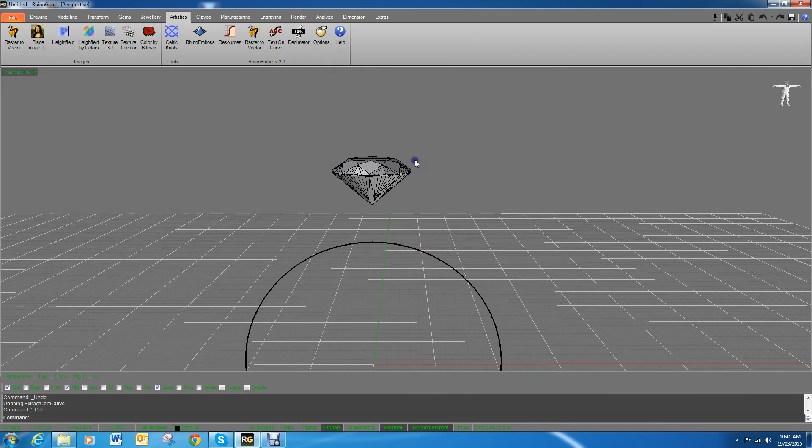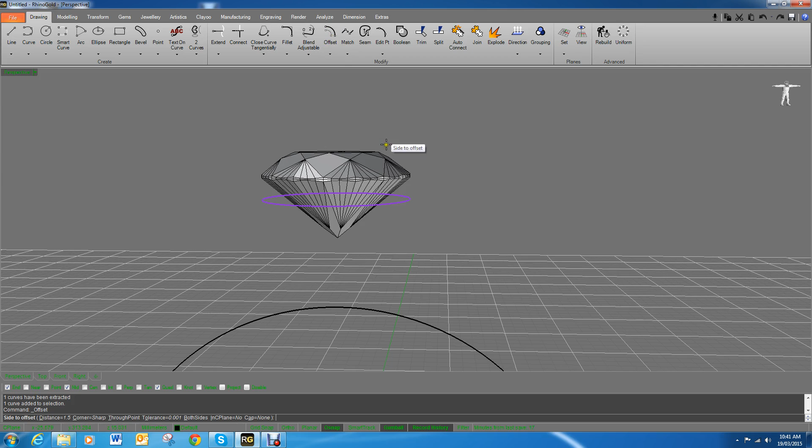We'll get started. We'll pick up the diamond, go to the Gem tab, extract curve, and perhaps lower it a bit by -1 mil, and I'll offset that line.

By approximately 1.6 mil, just a little bit bigger than the diamonds I'm using on the side. I'm going to use 1.5, and give it a slight angle where the setting is. I'll pick up these two curves, and tapping the Alt key you'll see the plus sign coming, and now you can type 1.5 mil and it gives you a duplication of that line below.

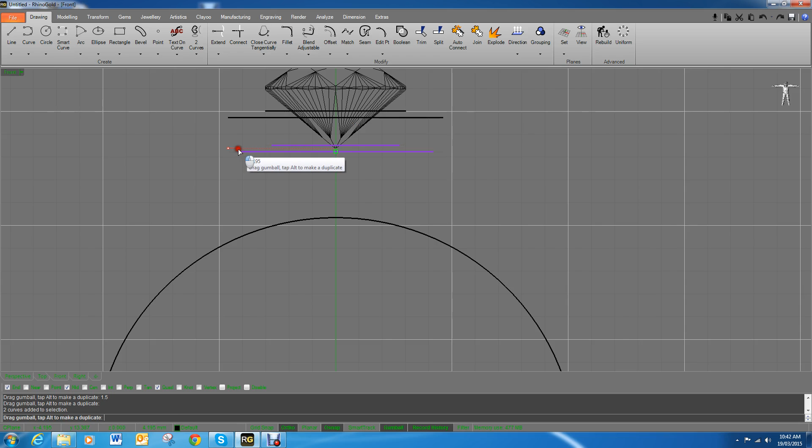Highlight these and scale it down a little bit to get a slight taper on it, as well as take the inside one and scale it inward a little bit so you have a little bit more body on the halo from the back where it's not going to be seen. It can be a little bit thicker.

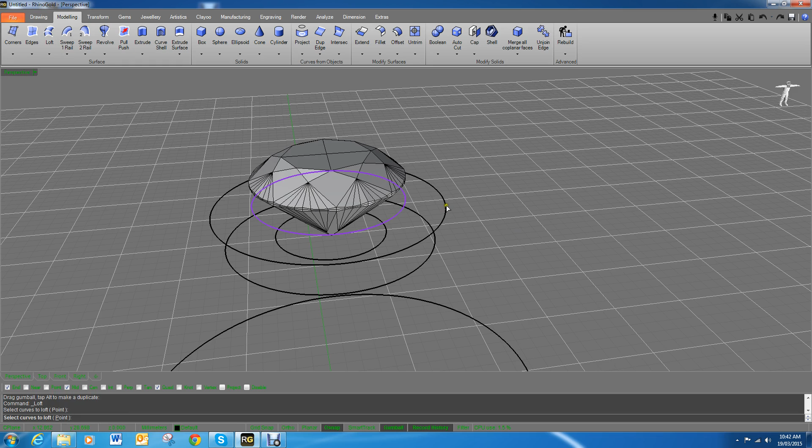From modeling, you get loft, click 1, 2, 3, 4, make sure you pick them in order. Doesn't matter which order to start, as long as you put them all in order - you can't jump in between. Make sure the lines are correct, press enter again and click close loft.

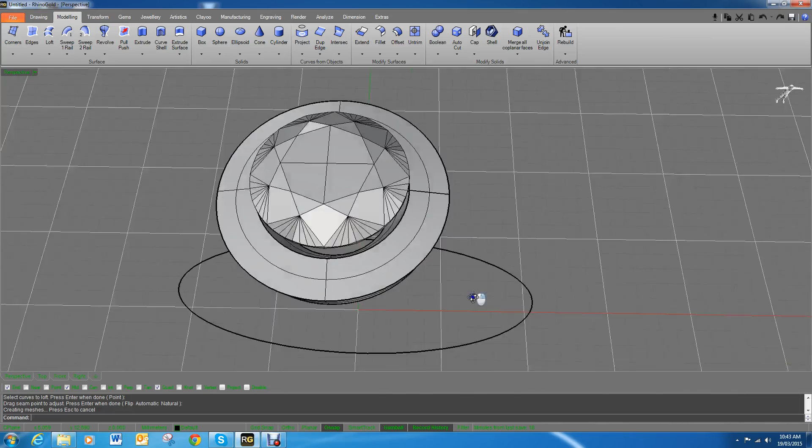And now we've got the plate to place a gem on it. I'll pick up... it's important to add a couple more layers every time you start a new job, just to be able to use different color layers and hide them. Some jobs require a lot more.

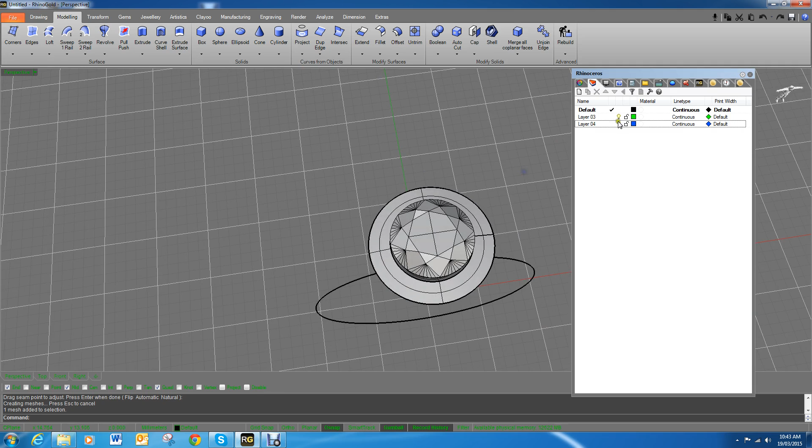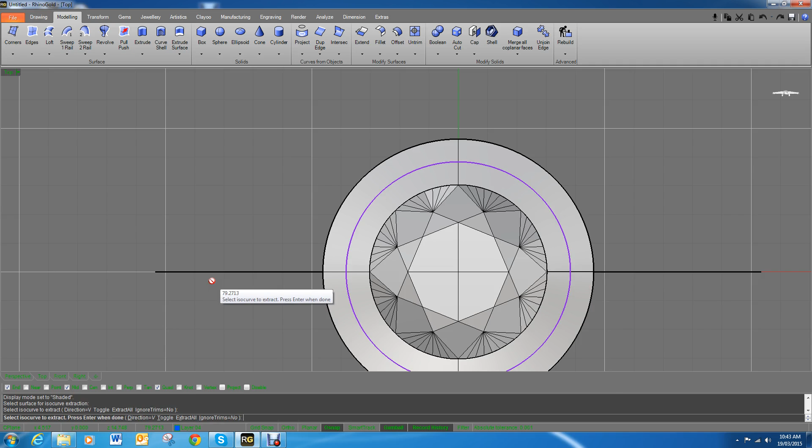So now I'm going to pick up the blue one, and from the top view I'll go to duplicate edge, tap and extract ISO curve, and this is a good tool that actually gives us the ISO curve of the surface, and on it we can apply the gem.

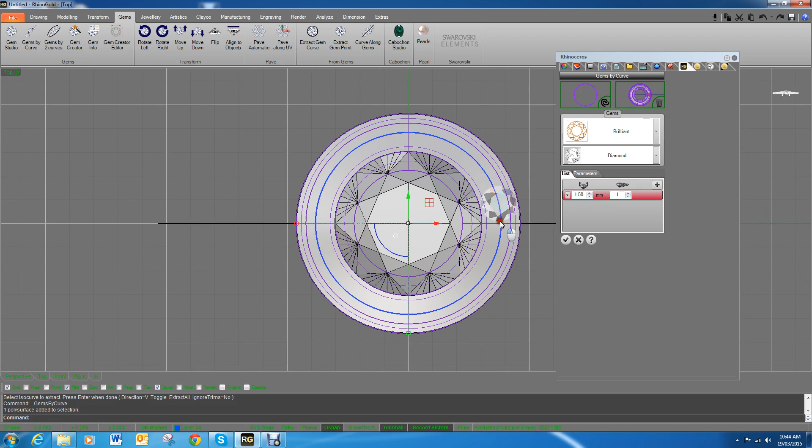So if we go to gem online, as you can see, it already picked up the line. Now it's asking for the surface, and it started with the first diamond. We need it at 1.5, we'll go up to 1.5. We'll gap it a little bit here, because the second stone is going to run from below it.

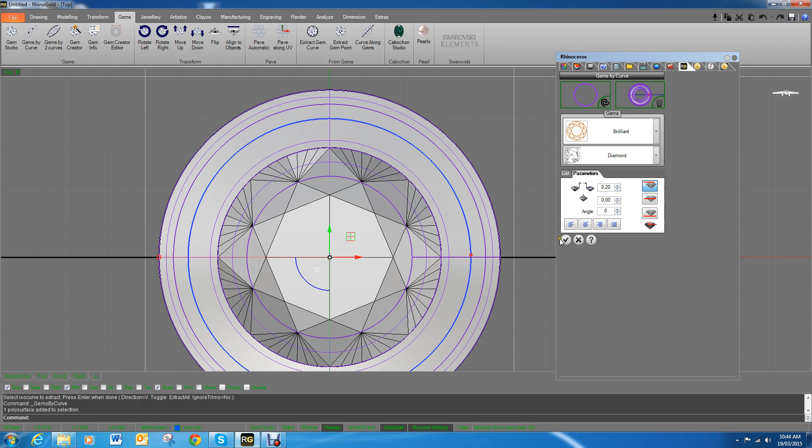Now remember, you don't need to do the full circle, you only need to do a quarter. So I'm going to keep tapping more and more until I get the quarter right. And in the parameters here you can go and select where you want the diamonds to be. I want them to be below level with the surface where the line is, so press accept.

Go to shaded mode, wire mode. Now that stone, as you can see, is not directly in the center, so what I'll do is pick all of them up and go to the rotate tab, and rotate the center of the stone to the center of the plane, and that gives me equal space when I apply the others.

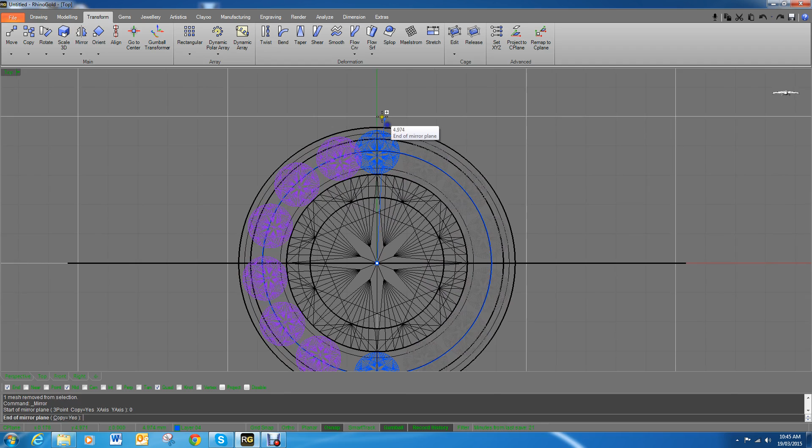And as they are highlighted, you go and select mirror, and mirror it to the other side, and then you also select these and mirror to this side, and there you go. You've got now your diamonds lined up, all spaced evenly. I think it's about 14 of them, and that is exactly what I want.

So this is stage 1 of this video. I'm going to pause it now and get back to you in a second.

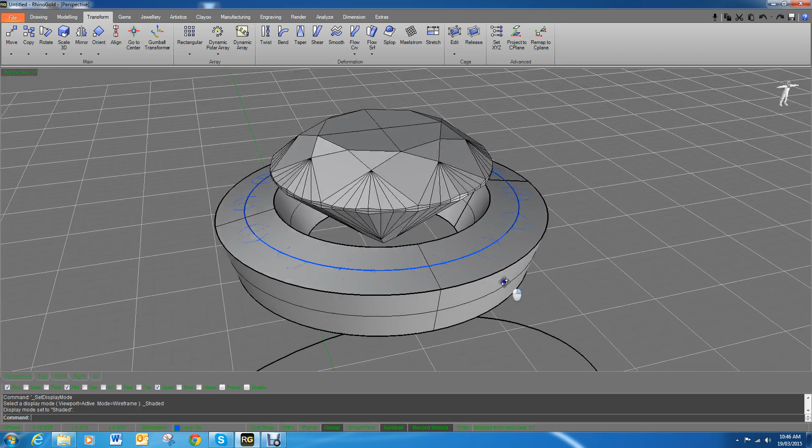Welcome again. As you can see, we applied the diamonds. Now we need to make the cutters. Once again, you can go to automatic cutters and it will give you cutters, but sometimes they don't come out nice and straight on top of the diamond. You need to do a lot of tweaking, so it takes just as long to do it by hand. Why not do it by hand?

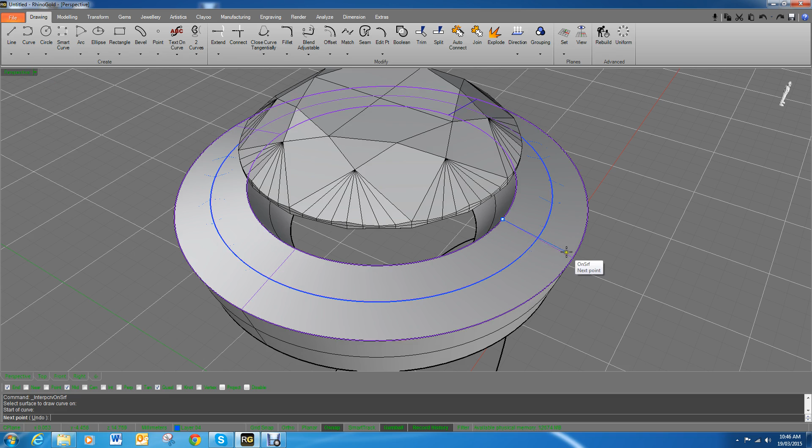First thing I'll do here is, this is my center origin, where the first diamond is. I'll go to the curve menu and pick up interpolate on surface, and pick that surface. I'll draw a line from that edge to that edge. Now I've got a line here giving me the center of the ring, of the halo.

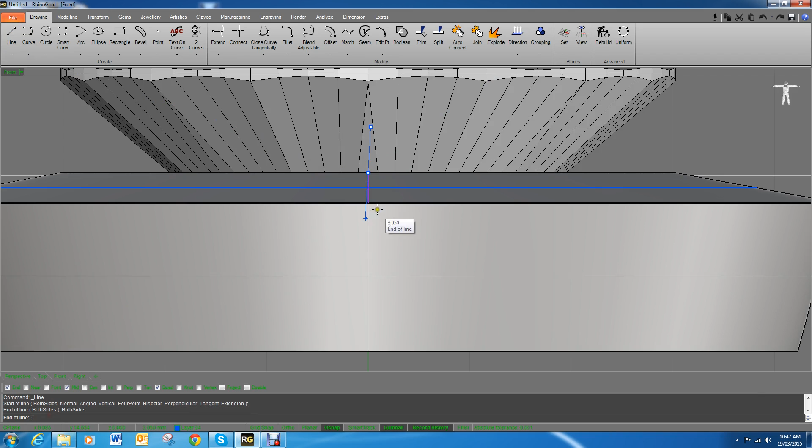From the front view, I'll pick up the end of that line, just to know where it is, and then in the middle I'll select line, straight line, both sides, with the wire 3/4 or about 90%, 80% of the diamond from here to here. See how important it is now to have two different colors, because you can work on one.

Arc start, end direction at the start. So from here to here I'll come down. In fact, I might pick up a different layer now just to see it better.

So we're back to the arc direction at the end. From here to here, with the shift on, I'll bring it all the way down. So if I need to go any lower, I'll go to the first.

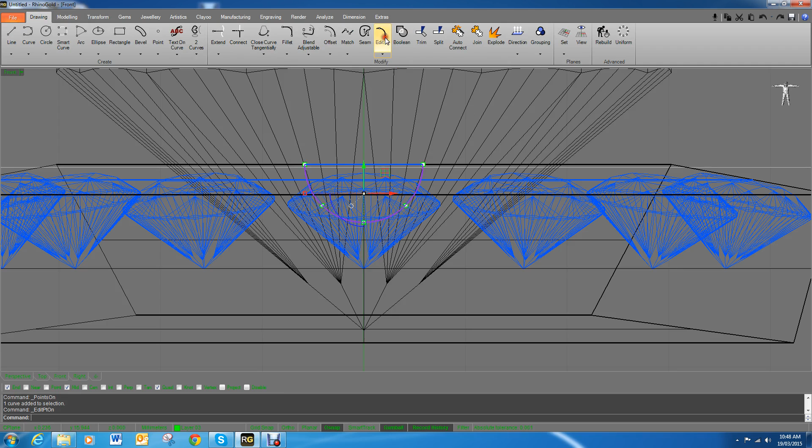You need to rebuild this because it will only give you 2 points. If you go to the edit points, it'll only give you 2 points on it. Actually it gave me 5. Sometimes if it doesn't give you 5, you can go to rebuild that curve and type 5.

So now I'll pick up these 3 points, including this one. Make sure you pick them all up, and bring it down to about here.

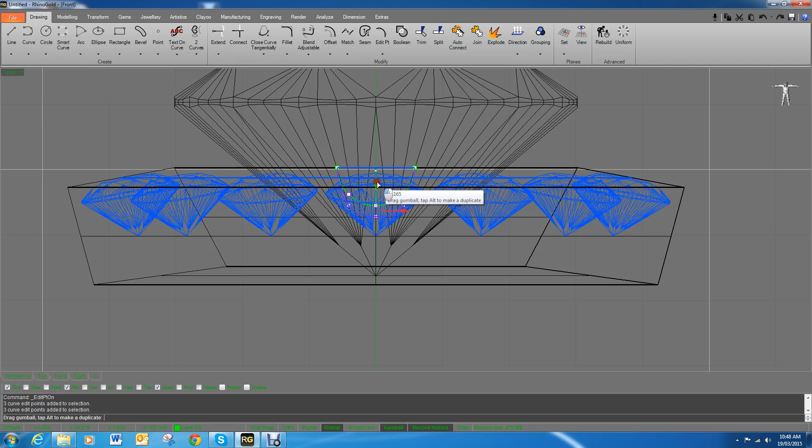3/4 of the way off the diamond, and that obviously gave us a slight dish here. We'll come down with that by itself. Okay, now we'll join that line with this line.

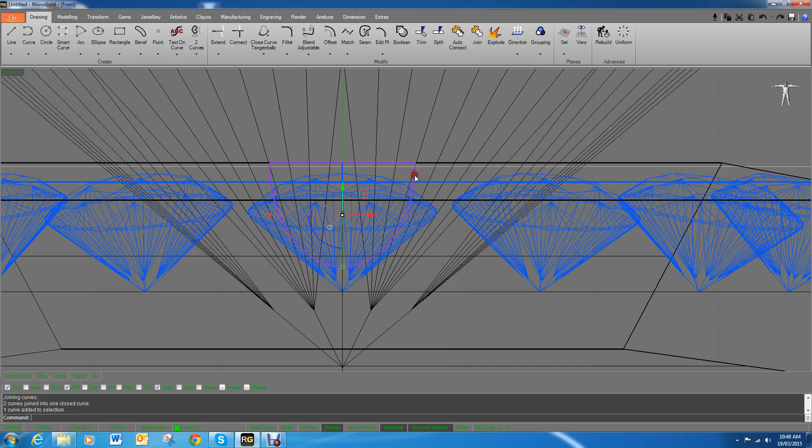So from perspective view, the line is on the inside. Take it a little bit outside the plane and extrude it now. Extrude it one way. We don't need it both sides, so it's just one side. Make sure it's solid, one side.

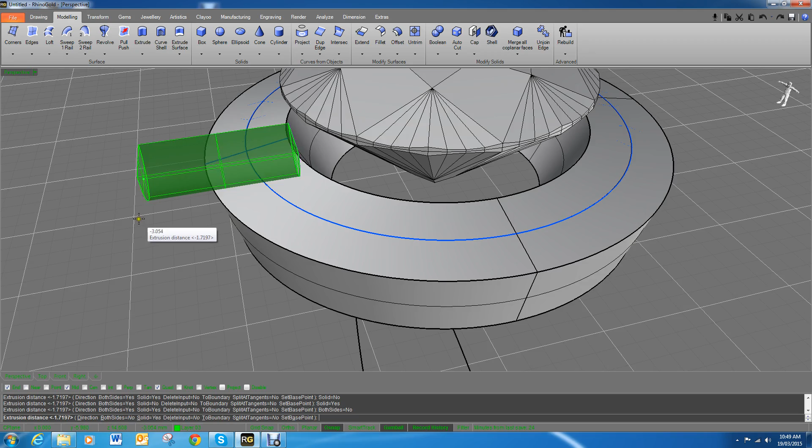As long as it passes this, we've got the first one. Now this is going dead straight. We can tilt. Sorry, it's only tilt this face, so we can tilt it until it's lined up nicely with

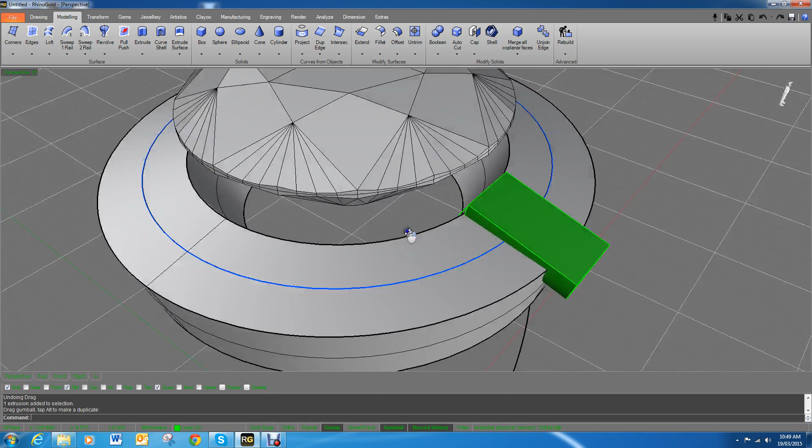Adjust it, make sure it's going through nicely, and you can often with the halo have it being cut deeper towards the outside and keep some more strength towards the inside. That's not a problem.

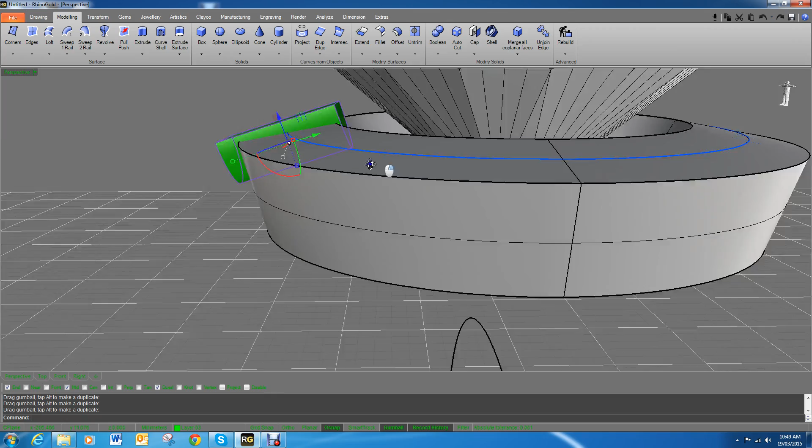I'll hide the diamond, and like we talked before about, and I won't need that curve anymore. Control Shift, select the surface and taper it. Taper it a little bit with 3D first, and now do the same.

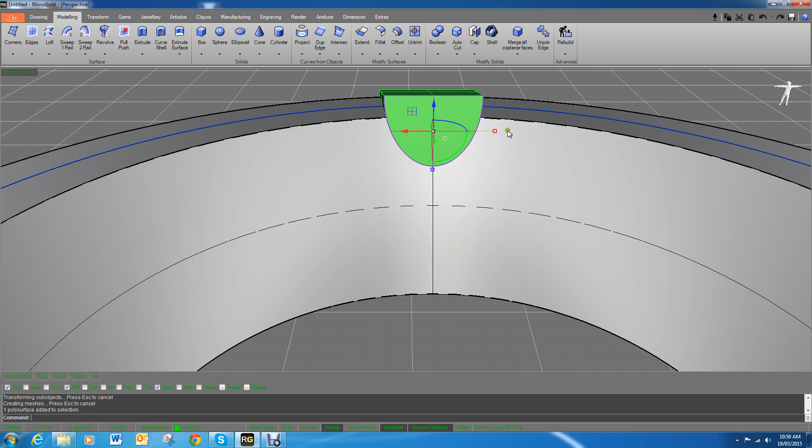Control Shift, select, and now only 1D. So from top view, that'll give us an idea how it's cutting.

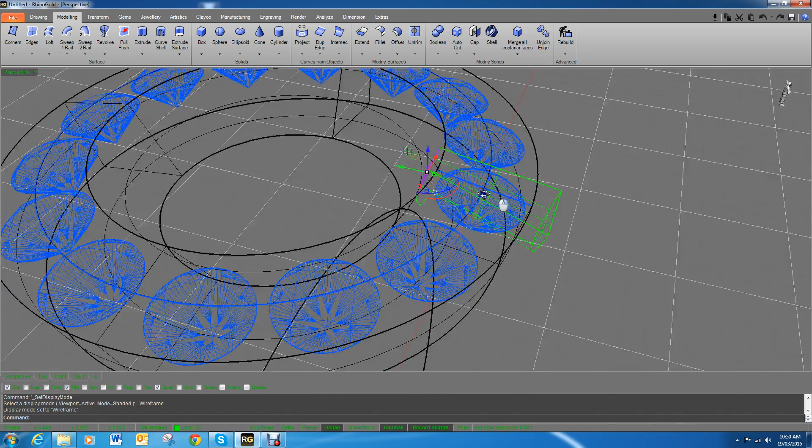So we need to have similar gap between the diamonds, between the top and the inside, the outside and the inside. That looks to me that it's okay, but once again, if your record history is on, you can make that adjustment later after you array all of them.

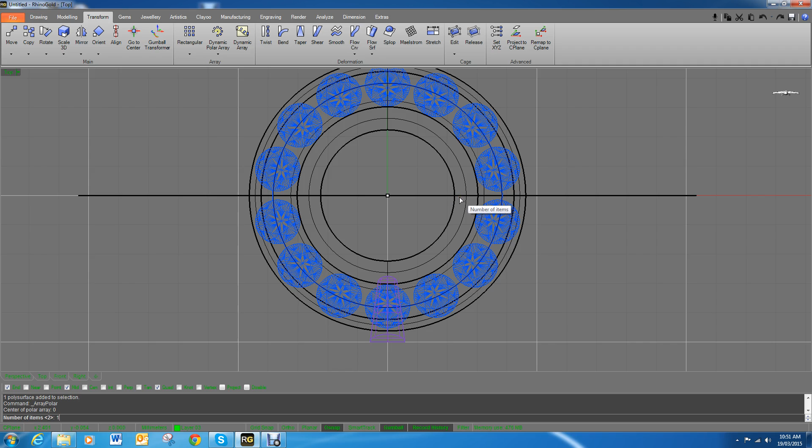So from top view, I'm going to array, polar array, 0, enter, type number 14 pieces we need, enter, enter, enter. And there you go, you've got

those cutters everywhere. Now the space between here and there should be at least 0.8. So we'll measure it from here to here. We've got 1 mil, so we can afford to scale this a little bit bigger.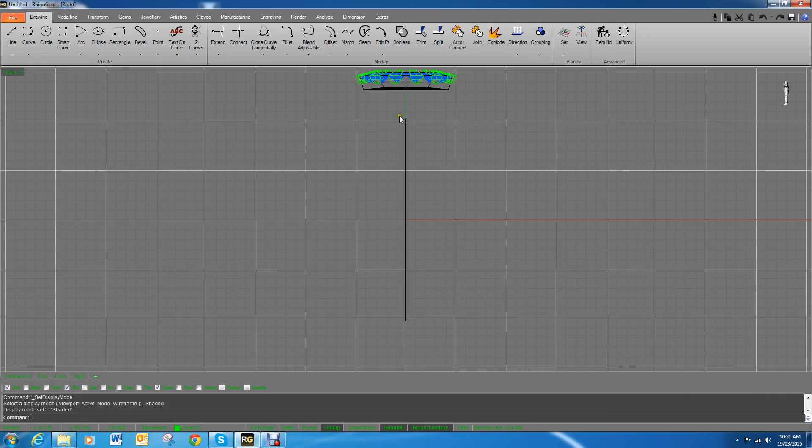Now from the right view we're going to produce the second cutter. Once again I'll go to the interpolate on surface, select the surface, get it lined from here to here just to get the center line right. From the right view

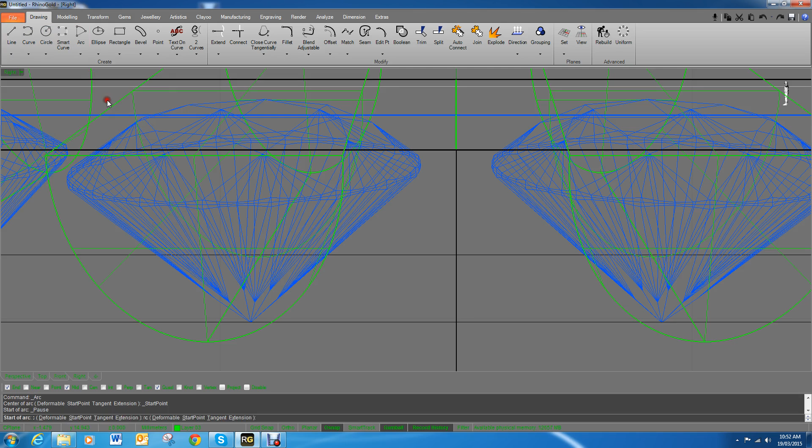approximately from the back of that line, pick up the arc direction at the start from here. Oh, sorry, it's the other way. If that is my line, so somewhere in the middle here, arc direction at the start.

I don't want it to go as low as the middle cutter, so that can go from here to here. Bear in mind you've got to leave minimum of 0.4 between the edge of the cutter and the edge of the other cutter.

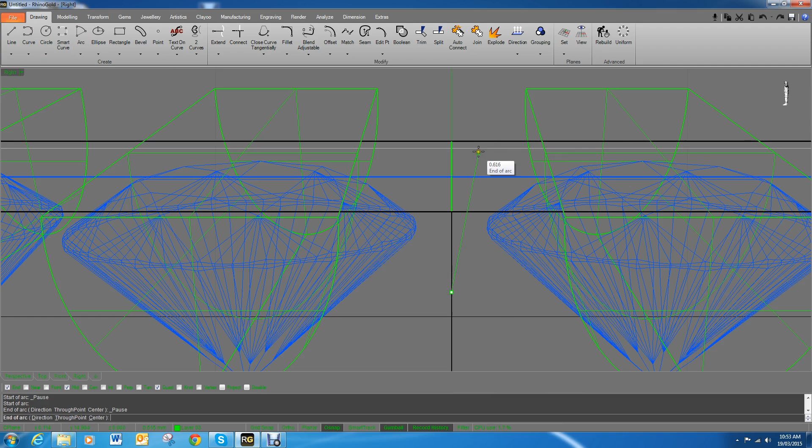So that's a little bit less than 0.4. We need it to be even less than that. So I'll do it again. And we can do the scaling later once we've got all of it ready. A mirror.

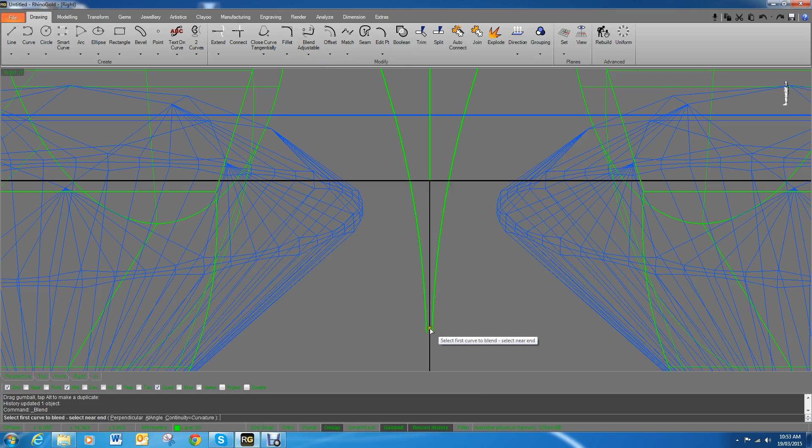Always important not to have a very sharp end on anything. So if I would move this, it'll move the other one, and go and blend this with this, and join it, minus that.

And now add one more line to close it and join that with them too. Join. So as you could see, it's in the middle of the ring this time.

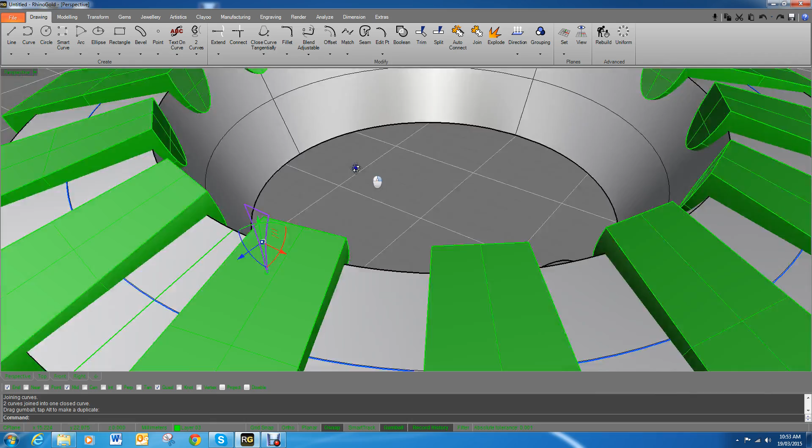Might have to do a small adjustment to it. This time I'll adjust the curve before I extrude it and take it up a little bit. And now I will do the extruding from the right view.

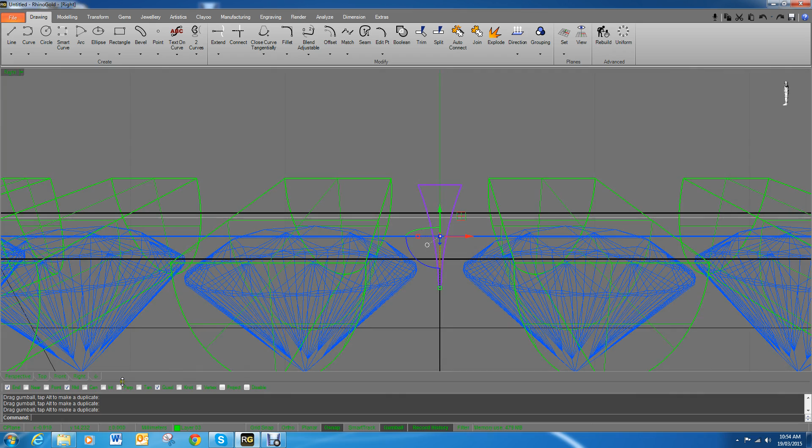Just is it the right view? Oh, sorry, from the front view, just so I can see how far out I need to go. Extrude, and I'll make it the same length as the others. And now I've got that middle cutter.

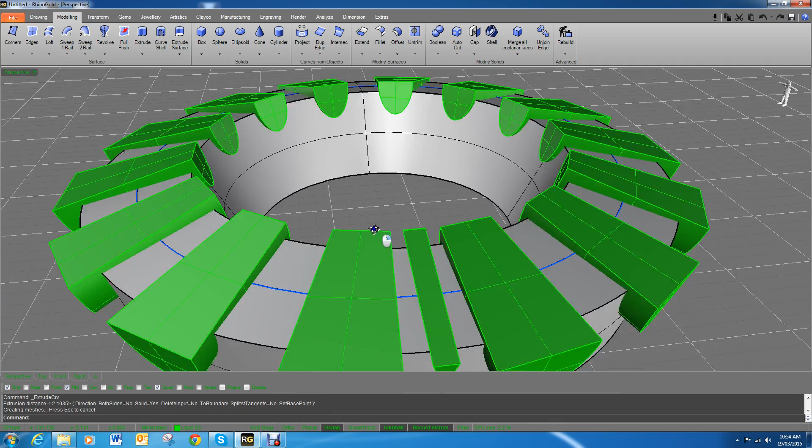Before I start cutting away, I need to taper the inside. Once again, Control Shift, pick up that surface, and it's only 1 degree. You need to make it as narrow as possible to maintain 0.4 minimum of the claw here. So we don't need that curve, we can get rid of it.

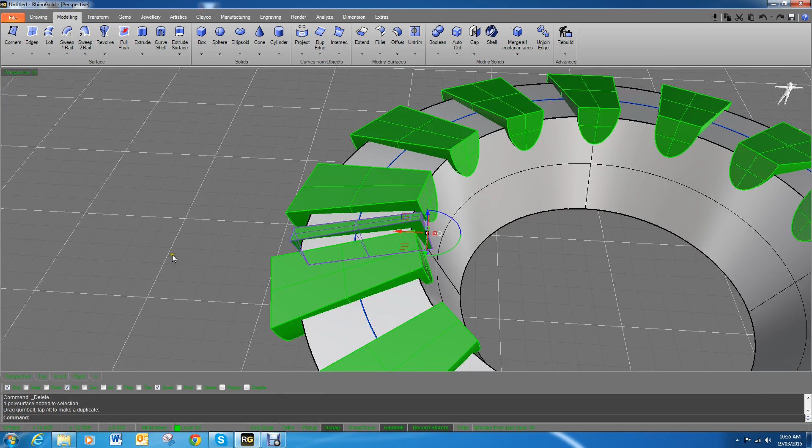We'll do one final measurement to see if we are under or close to 0.4, from here to here. It's telling me 1 mil, that's not right, so from the front view I need to do this, or the right view. From here to here, it's showing 0.2 of a mil, so it's got to be a little bit smaller overall.

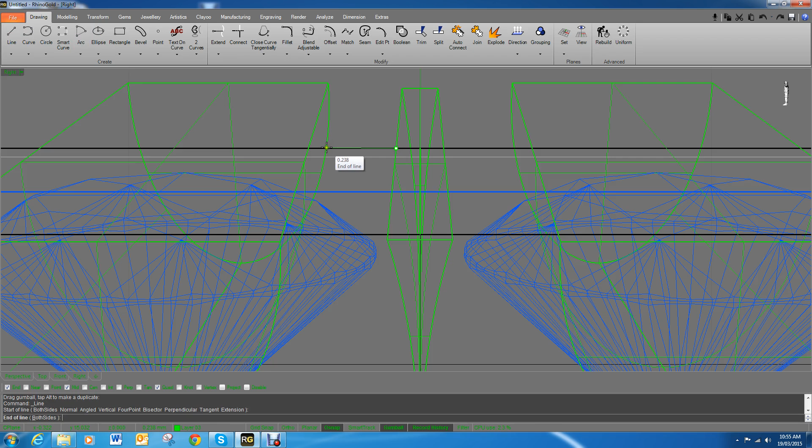Sometimes you might need to adjust the first one. That's it, that adjusts them all.

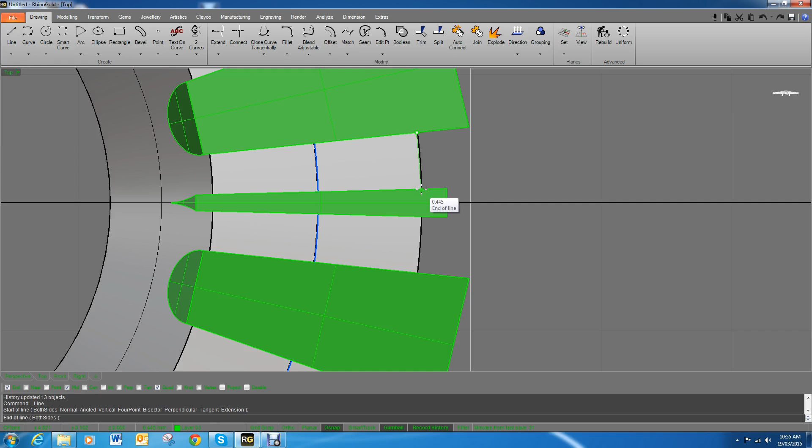That's like 0.45. Okay, same deal. I'll pick up that surface and polar array 0, enter 14, enter, enter, enter.

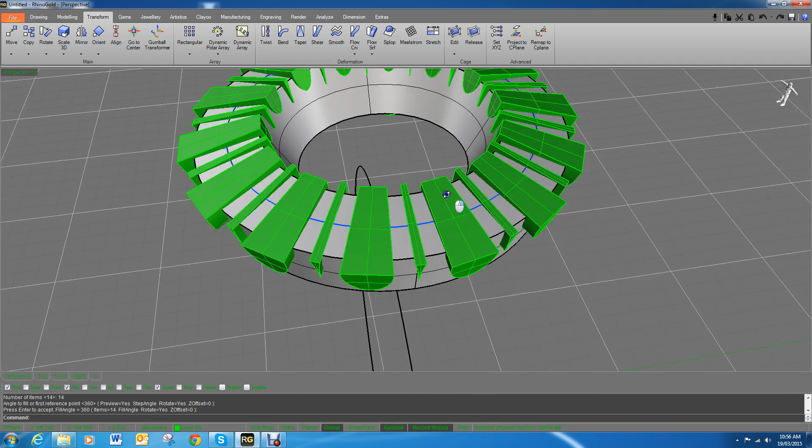Beautiful. Now we'll go back to that line and we'll go and pipe it.

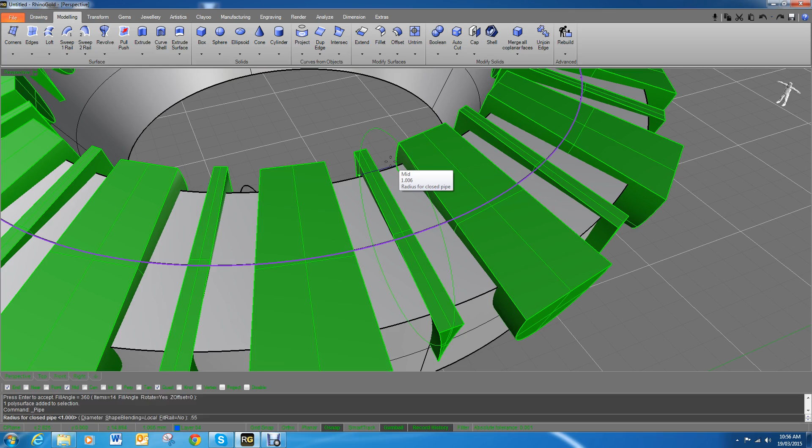From the cylinder pipe, now that can be 1.1 mil, so I'll type 0.55, enter, enter. So that's giving me 1.1 of the mil.

Now half of that wire, the pipe is inside, so I'll take it up a little bit because we don't need to go down that deep.

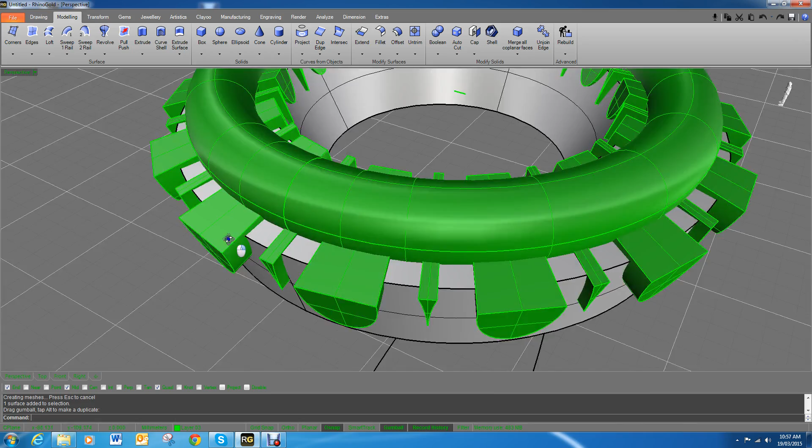And now I'm going to boolean everything, boolean difference, that with all the green, enter.

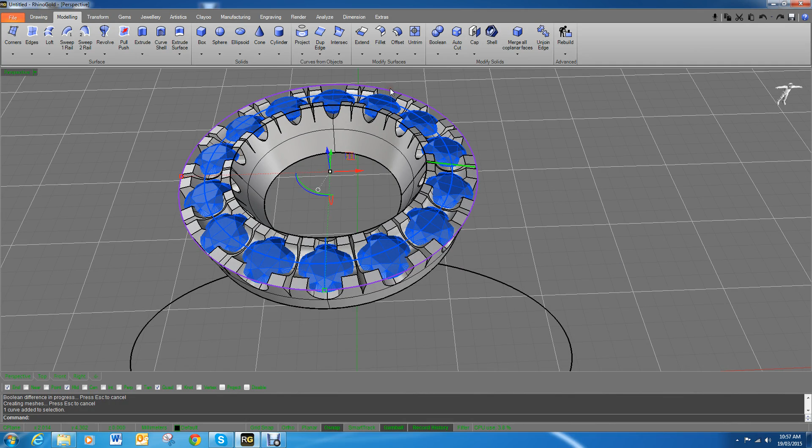And there you go, you've got now a beautifully made halo. Delete that curve, we don't need it any more. That's the quickest way, minus the... now we've got the halo.

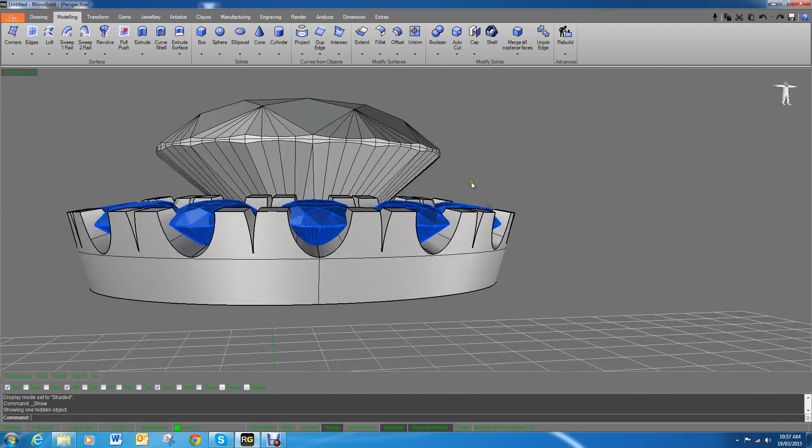If we bring back our diamond, which is hiding, there you go. Now we can select all the diamonds and go to jewelry cutter.

I'll show you how I adjust the cutter. The cutters automatically go to this height. The height at the moment is okay, but sometimes you need to increase it to see them from the other side.

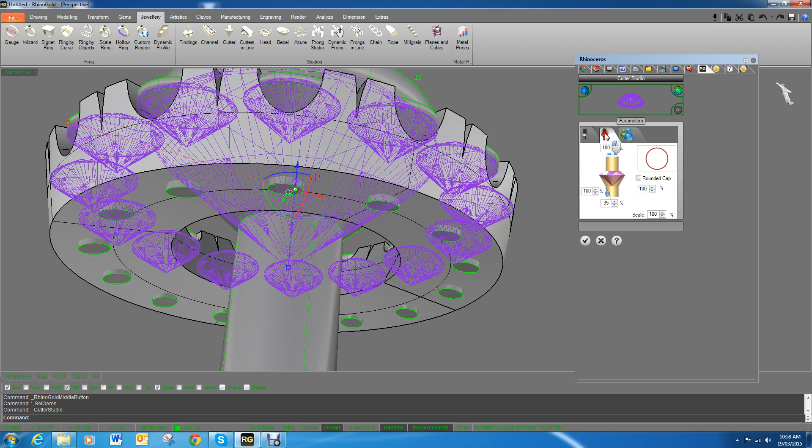Now in this step I do the taper at 50%, so they're not really that small holes at the back, so 50 or sometimes 60. I'll scale it down to 90% in overall size, and that's ready now.

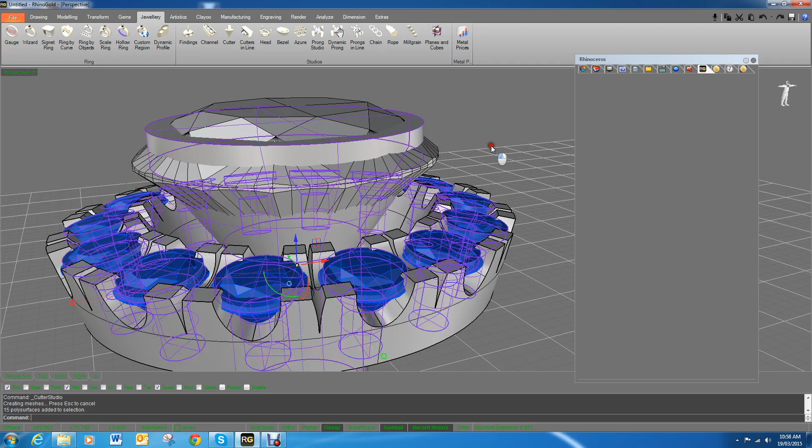Now this particular one, I picked up the center diamond with them by mistake, but it's not going to do anything because it's not touching anything.

And now I'll just go boolean union, boolean difference, that with all these cutters.

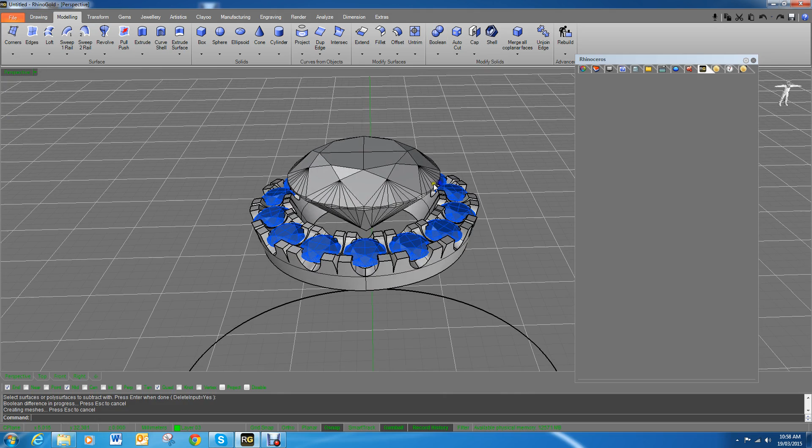Beautiful. So if I pick up the diamonds now and hide them, you've got the hole, you've got the nice little cut, it's ready to be set, even by an amateur.

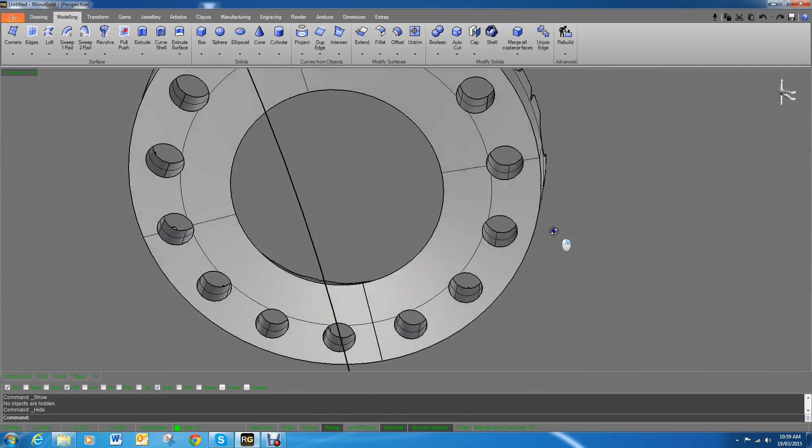Now as you can see here, on one of them, the actual hole is more on one side. The diamond is not tilted enough, but we have thickened the back of it, so it is in the middle, providing that was the same size.

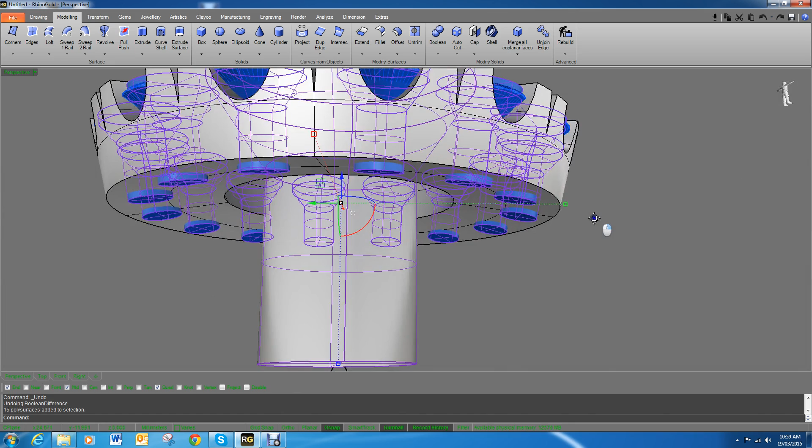But if you wish to give it more of an angle, let's bring back the cutters. As you can see, it picks up the cutters all together as one, so you have to ungroup them by clicking the group tab underneath, ungroup.

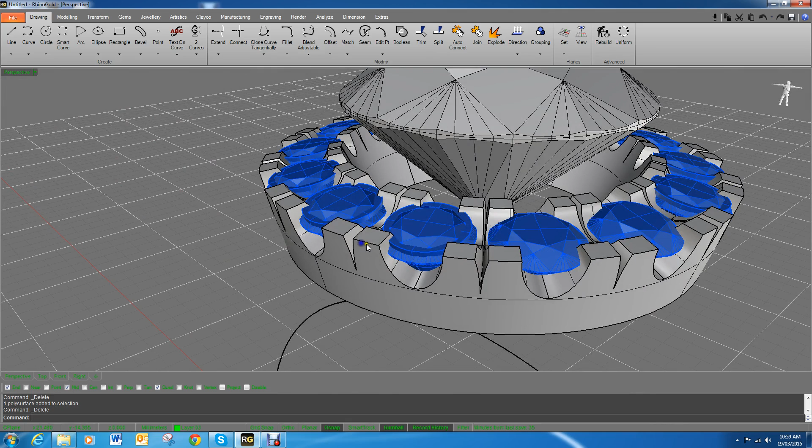And perhaps get rid of all of them and keep one, so delete. I'll keep the one that I can line up square with, delete, and I'll just keep this one, delete, and I'll just keep this one.

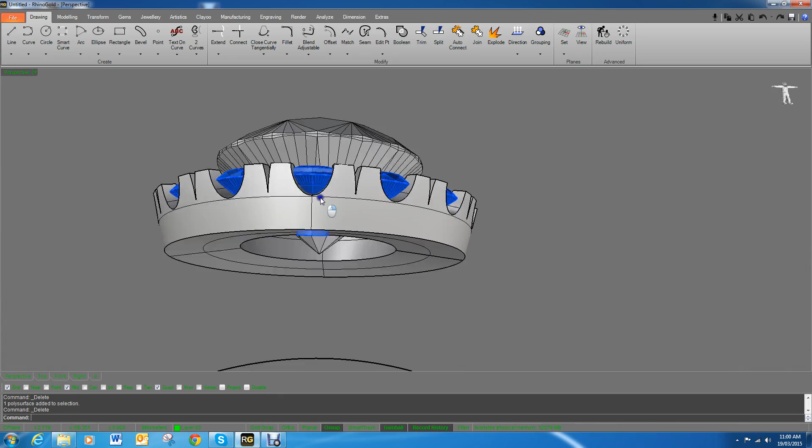And from the right view, this is the cutter we have. I go to cage edit, boundary box, world, enter.

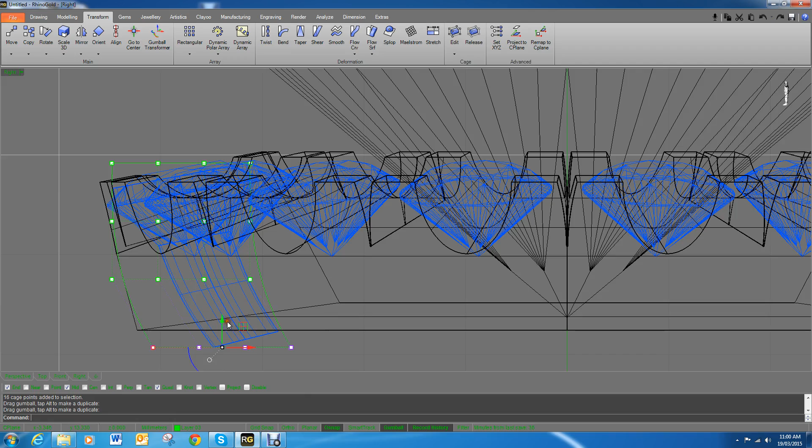Now you can pick up the bottom lines and bend it so it's slightly inside, and you could check with the perspective view to see how far in you went. You can afford to go a little bit more, and that's perfect.

So now the hole is roughly in the center of the plate, even the bottom of the plate is bigger. You could do that, you could tilt it, but I like to keep it as it is, sitting nicely at the diamond.

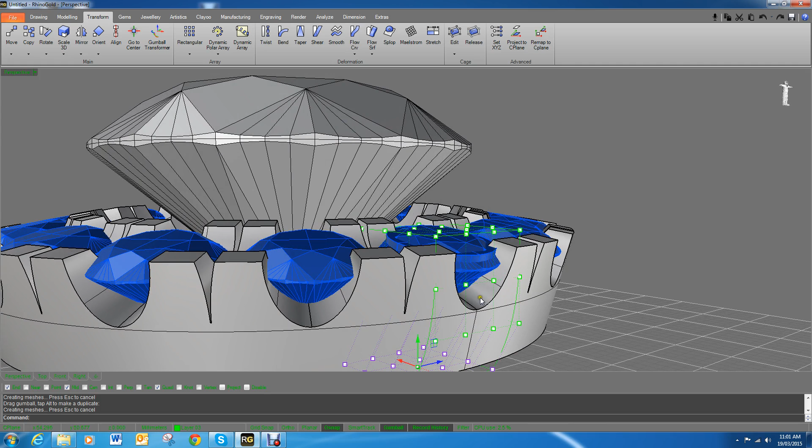I'll just want to bend the back of it. So let's get out of there, delete that box boundary, select the cutter, go to top view, polar array 0, enter.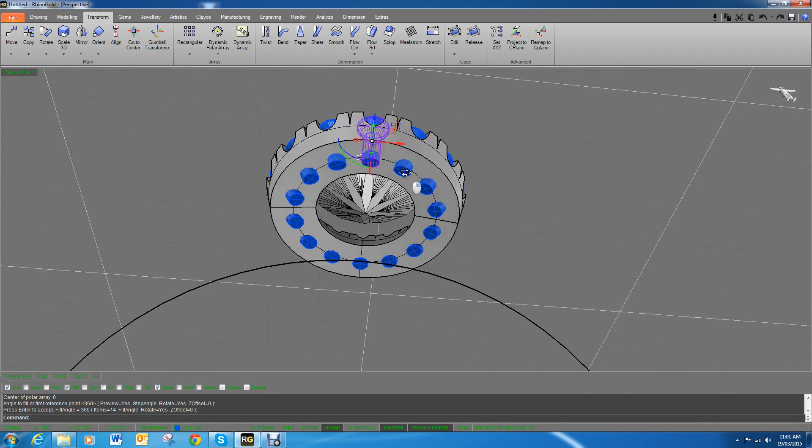It's still selecting 14 anyway, and now we've got all the cutters in the way we want. I'll go to boolean union, boolean difference, pick that one with — now you need to select them separately because we ungrouped them.

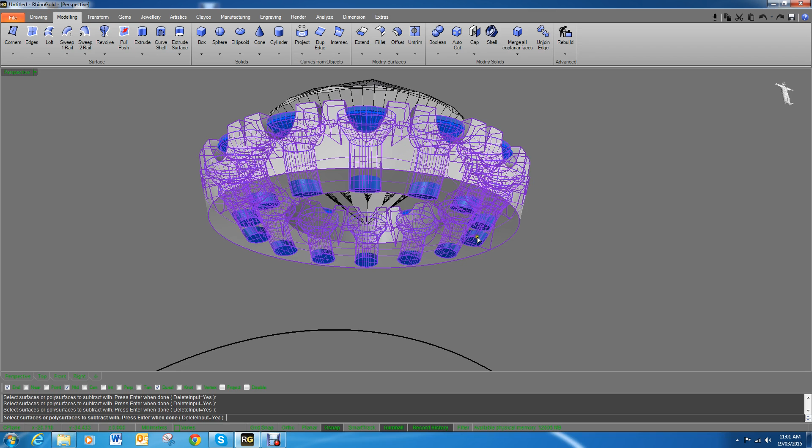And there you go, the cutter did not change at all from the top. If we hide the diamond, it didn't change at all from the top, it just had a little bend on it from the back. And this is it, that's the top part of the ring.

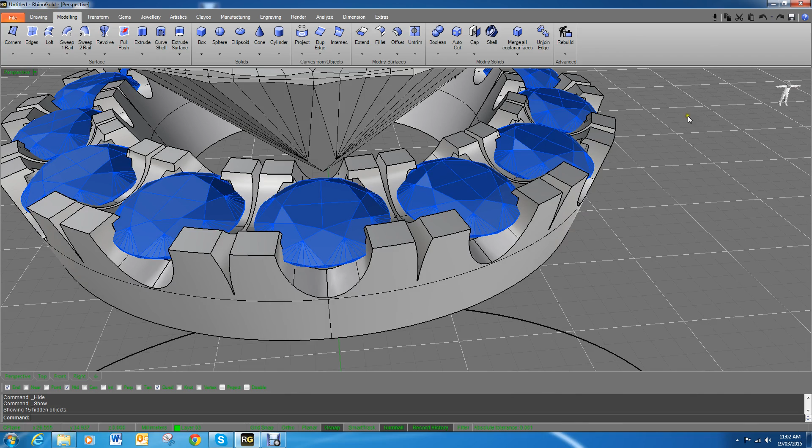Next tutorial I can show you what we can do from the back side, whether you want to do a little bit of a gallery cap or only 4 bars holding this halo, but overall this is how you make a halo with micro cutting and get a perfect cut in between. Thanks for watching.